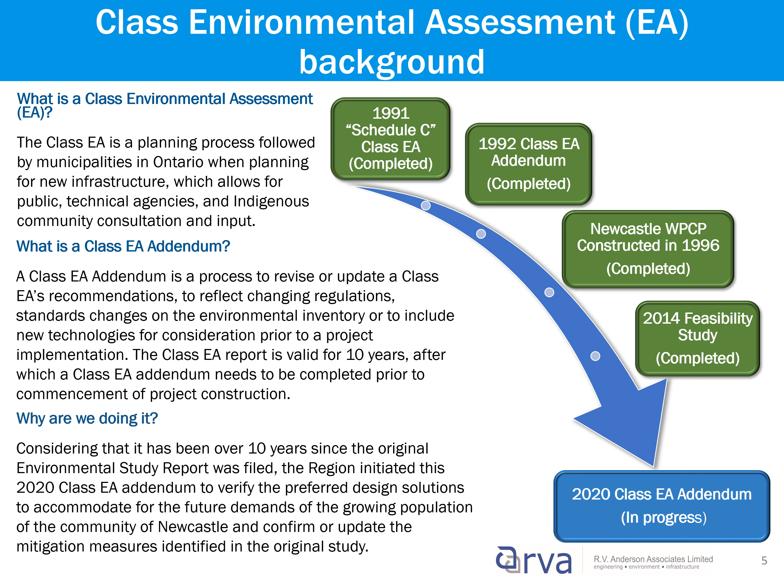There are a total of 4 steps in the study. Step A, which includes the publication of the Notice of Commencement, was initiated in June 2020 and identified the problem and opportunity statement. Step B is where we are right now. It involves completing the required background studies and confirming design solutions for the capacity re-rating and upgrades for the Newcastle Water Pollution Control Plant. The preferred solutions are being presented for feedback from the public as part of this PIC. Upcoming steps include Step C, which is to prepare a Class EA addendum report for public review, and Step D is implementation, which in this case includes design and construction of the preferred solution.

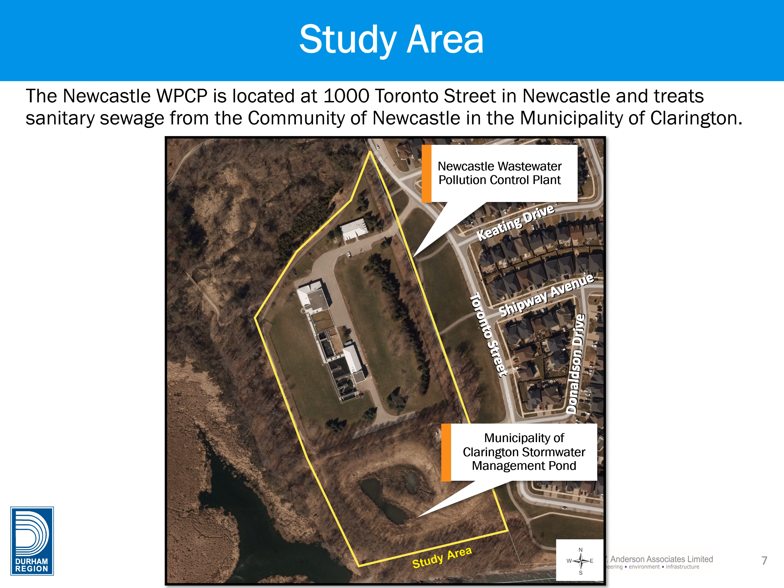Slide 8 shows the historical timeline of the Newcastle Water Pollution Control Plant. In 1991, the Region of Durham completed a Schedule C Class EA study to determine how to treat wastewater generated by the growing community of Newcastle.

The study ultimately recommended that the old Graham Creek Water Pollution Control Plant, which was treating the sanitary sewage for the community at that time, be decommissioned, and a new plant, currently the Newcastle Water Pollution Control Plant, be constructed in 4 stages.

Shortly after the completion of the 1991 study, the region initiated a Class EA addendum in 1992 to reevaluate the preferred treatment process alternatives and recommended that the newly proposed Newcastle Water Pollution Control Plant use a conventional activated sludge process, or CAS. In 1996, the new plant was constructed and commissioned with an initial capacity of 4,086 cubic meters per day.

The old Graham Creek Water Pollution Control Plant was then demolished. Due to the continuing growth in the community of Newcastle, the region undertook a feasibility study in 2014 to identify upgrades required to provide additional wastewater capacity at the plant while ensuring compliance with effluent limits. The study confirmed that the plant capacity could be increased by completing capital upgrades and operational modifications, which will be further described in later slides.

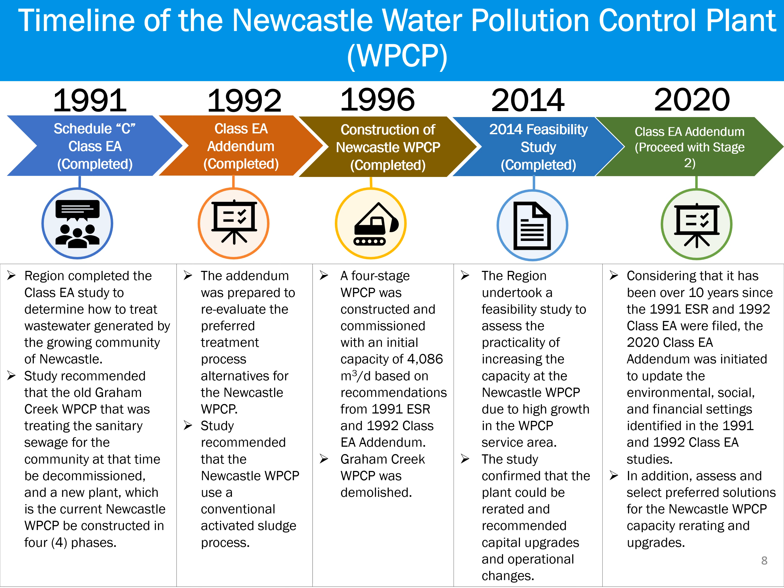The main objective of this Class EA addendum is to update the environmental, social, and financial settings identified in the 1991 and 1992 Class EA studies, and to assess and select preferred solutions for the Newcastle Water Pollution Control Plant capacity re-rating and upgrades. The plant uses the conventional activated sludge, or CAS, treatment process and currently operates at an average day flow, ADF, of approximately over 4,000 cubic meters per day.

The treatment processes at the plant are as follows. Number 1: the raw sewage pump station receives raw sanitary sewage, also known as influent, and pumps it into the first treatment process. Number 2: the screening process removes large objects in the influent such as debris, paper, plastics, and rags to avoid damage and clogging of the treatment equipment downstream.

Number 3: after screening, the influent goes through the grit removal process to remove heavier and finer solids including sand, gravel, etc. Number 4: after grit removal, the influent is processed in the primary clarifier to remove floating and settleable solids. Number 5: the CAS aeration tank process is a biological process used to further treat and break down contaminants in the influent using microorganisms.

Aeration tanks and blower equipment are used for the CAS process. Number 6: ferrous chloride, a chemical compound, is added in the liquid stream in the aeration tanks to precipitate and remove phosphorus. Number 7: the CAS effluent then flows into the secondary clarifiers for further settling and separation of solids from the liquid.

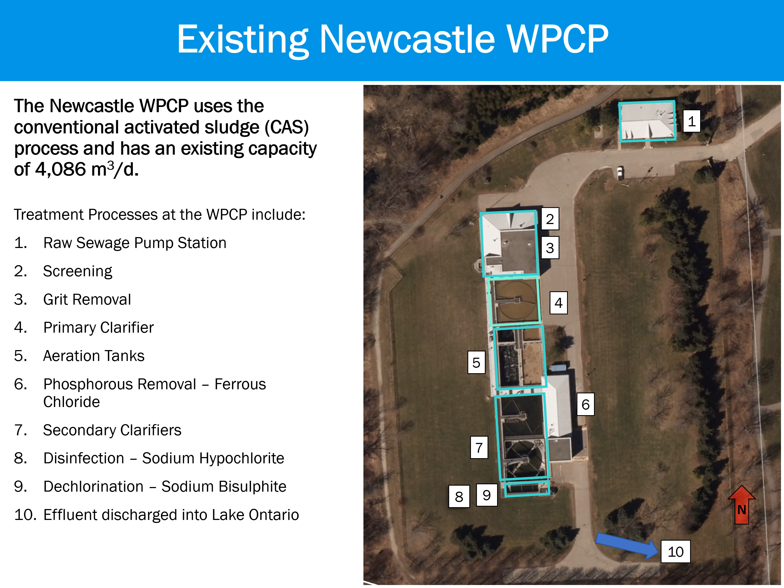As part of the Class EA addendum process, the Environmental Assessment Team has identified the problem and opportunity statement for this project. The 1991 Class EA and 1992 Class EA addendum project objectives were reviewed, and the Class EA addendum problem and opportunity statement was updated as follows.

The existing Newcastle Water Pollution Control Plant requires improvements to existing services and additional sewage treatment capacity to allow for future growth for the community of Newcastle.

To address these improvements, this Class EA addendum will review and confirm the preferred solutions that will: Number 1, meet the growing needs of the Newcastle community in Clarington by increasing the sewage treatment capacity of the plant through infrastructure optimization. Number 2, address the plant's sustainability by using more efficient equipment.

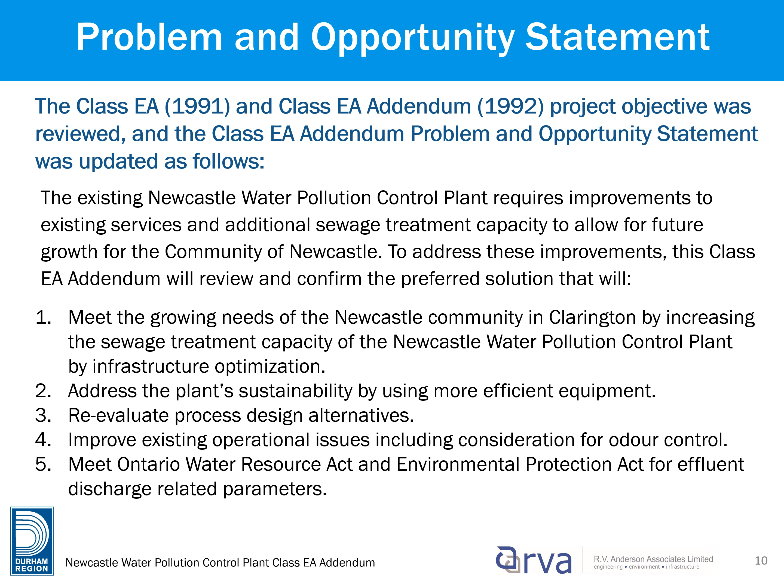Number 3, reevaluate process design alternatives. Number 4, improve existing operational issues, including consideration for odor control. And number 5, meet Ontario Water Resource Act and Environmental Protection Act requirements for effluent discharge related parameters.

In 2014, the Region of Durham completed a feasibility study to determine whether the existing Newcastle Water Pollution Control Plant could be re-rated from its current average day flow, or ADF, of approximately over 4,000 cubic meters per day and peak flow capacity of 12,300 cubic meters per day to a higher flow, in order to provide additional capacity for growth and reduce the capital costs of the next expansion.

The feasibility study included an evaluation of the existing plant, field investigations, and bench scale testing to determine the potential for re-rating by optimizing or implementing low capital cost modifications to the existing plant. The study confirmed that the plant can be re-rated to 7,200 cubic meters per day if certain upgrades and modifications were implemented. As part of this addendum, these upgrades and modifications were further assessed, and the recommended upgrades to be carried forward for implementation have been identified.

Capital upgrades from the 2014 feasibility study included in this 2020 Class EA addendum include raw sewage pumping upgrades, screening upgrades, aeration system upgrades, outfall diffuser modification, secondary clarifier weir modifications, and disinfection system upgrades. Details of these upgrades will be reviewed in further detail as part of this PIC.

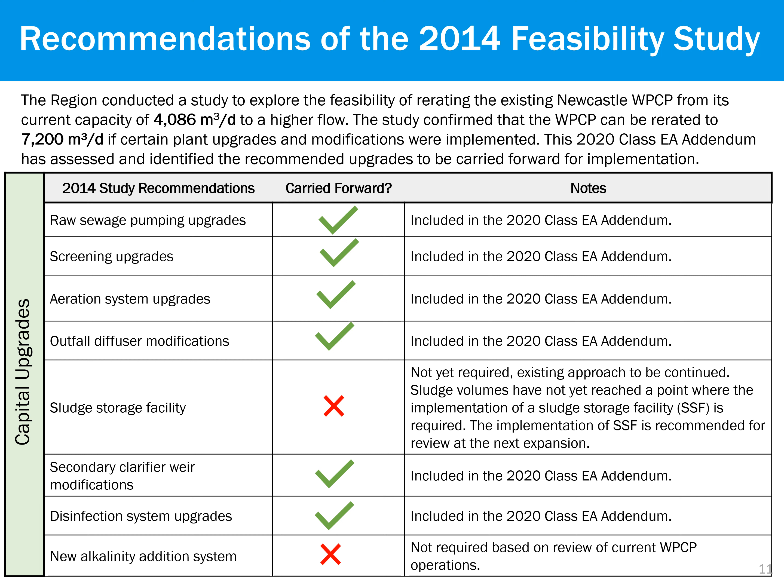Addition of a new alkalinity system is not yet required for the re-rating of the water pollution control plant, based on an updated review of the current water pollution control plant operations.

The next few slides provide a high-level comparison of the 1991 EA and 1992 addendum recommendations and the current 2020 addendum recommendations. The table presented on slide 12 summarizes the comparison of Stage 2 water pollution control plant expansion between the 1991 and 1992 EA studies and the 2020 addendum recommendations.

The 1991 and 1992 EAs recommended the construction of a new water pollution control plant that could be expanded in stages as the flow to the plant increased. At Stage 1, the new water pollution control plant was recommended to be constructed to handle an average day flow, ADF, of approximately over 4,000 cubic meters per day. It was also recommended that some key infrastructure be upsized to handle future higher flows, while other infrastructure and equipment could be added or upgraded in the future. This recommendation was implemented, and the Newcastle Water Pollution Control Plant was constructed and commissioned in 1996.

Currently, the Water Pollution Control Plant has an average day flow rated capacity of 4,086 cubic meters per day, which matches the Stage 1 recommendations. The 1991 and 1992 studies recommended 3 expansion stages based on the average day flow coming into the plant, as follows: Stage 2, approximately over 8,000 cubic meters per day; Stage 3, approximately over 16,000 cubic meters per day; and Stage 4, approximately over 24,000 cubic meters per day.

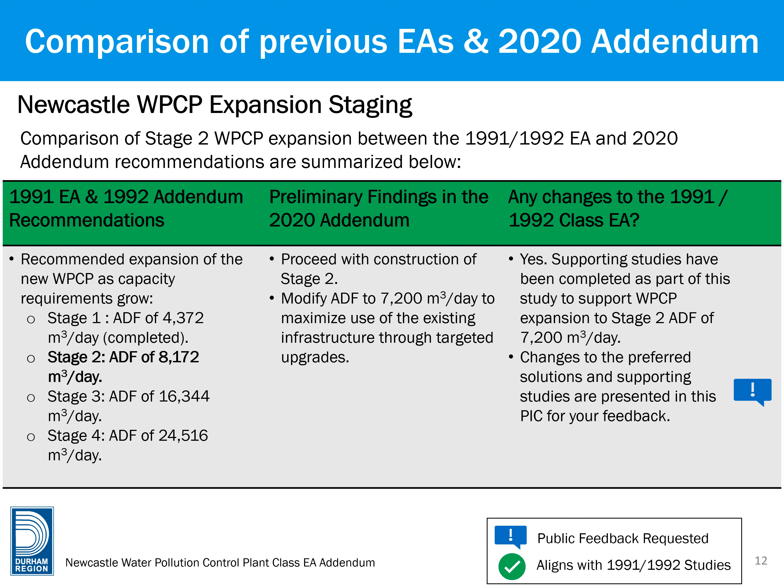Some smaller capital upgrades will be required as part of the Stage 2 re-rating of the Water Pollution Control Plant, which are presented in this PIC. Supporting studies to identify potential impacts and mitigation measures at the Newcastle Water Pollution Control Plant are also presented in this PIC for your review and feedback.

The table presented on slide 13 summarizes the comparison of the various Stage 2 flow scenarios between the 1991 and 1992 EA studies and the 2020 addendum recommendations and proposed service population.

The rated capacity is the amount of wastewater that the Water Pollution Control Plant is approved to treat by the Ministry of Environment, Conservation and Parks, or MECP. The rated capacity is based on the average day flows, or ADF, experienced by the Water Pollution Control Plant. The current rated capacity of the Newcastle Water Pollution Control Plant is approximately over 4,000 cubic meters per day. Currently, the average day flow experienced at the Water Pollution Control Plant is approaching the current rated capacity.

As part of this addendum, it is proposed to increase or re-rate the capacity of the Water Pollution Control Plant from the Stage 1 flow of approximately over 4,000 cubic meters per day to a new Stage 2 flow of 7,200 cubic meters per day to accommodate future growth and increased wastewater flows.

Wastewater treatment plants must also be able to handle peak day flows, PDFs, and peak hourly flows, PHFs, and specific processes and treatment equipment are sized to meet these conditions. The current peak day flow of the Newcastle Water Pollution Control Plant is nearing or at the limit of the capabilities of certain processes and treatment equipment.

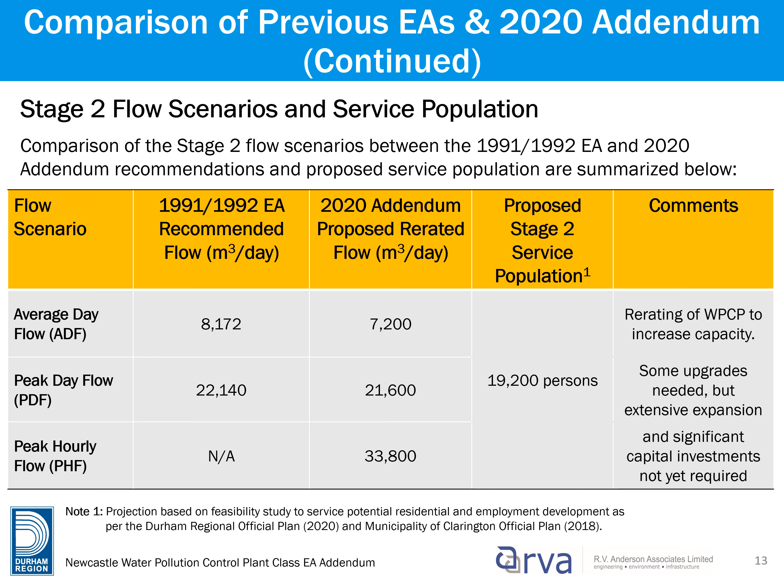Slide 14 shows the Stage 2 upgrades recommended from the 1991 and 1992 EAs in comparison to the 2020 Class EA addendum. The 1991 and 1992 EAs recommended for the Newcastle Water Pollution Control Plant's ADF to be expanded to approximately over 8,000 cubic meters per day at Stage 2. However, no specific process upgrades were recommended for the Stage 2 expansion. In addition, construction of anaerobic digestion facilities for sludge treatment upgrades were recommended.

As part of the 2020 Class EA addendum, it is recommended to re-rate the Newcastle Water Pollution Control Plant's ADF to 7,200 cubic meters per day. To achieve the re-rated capacity, the following upgrades are recommended to be implemented, including raw sewage pumping upgrades, screening upgrades, aeration system upgrades, effluent disinfection upgrades, and outfall modifications, including opening of existing diffusers and disconnection of stormwater sewer.

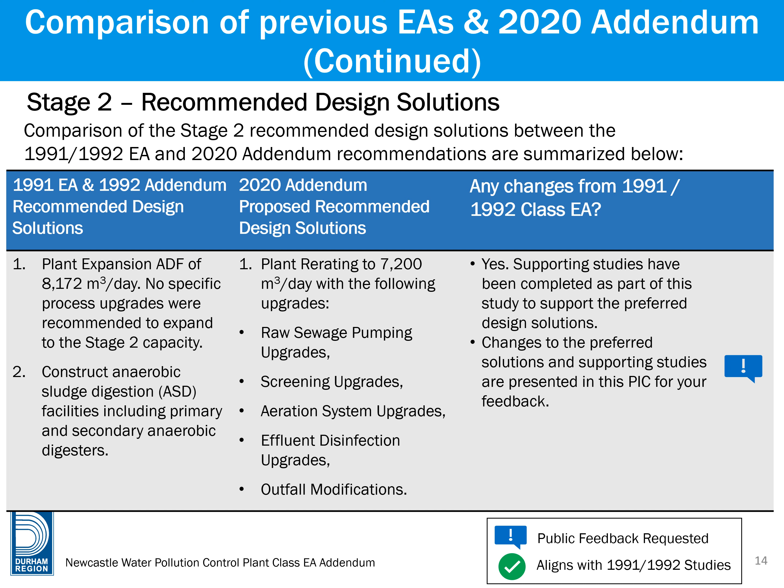It is noted that sludge treatment upgrades were not recommended as part of the Stage 2 proposed upgrades, which will be detailed further in the next slide. As such, this is a change to the 1991 and 1992 Class EA studies. Supporting studies have been completed as part of this study to support the preferred design solutions and are presented in this PIC for your feedback.

As part of Stage 1, a conventional activated sludge, or CAS, process for treatment including on-site storage of raw sludge was constructed. The on-site storage and transfer of sludge to Port Darlington has been ongoing since the Newcastle Water Pollution Control Plant was constructed. The 1991 and 1992 studies recommended that when the capacity of the water pollution control plant will be expanded in Stage 2, an anaerobic sludge digestion facility was to be constructed.

Since the design flow for Stage 2 is being reduced and the current sludge volumes are lower than projected in the 1991 and 1992 reports, the transition to an anaerobic sludge digestion facility is not yet required. This 2020 addendum recommends postponing the construction of a sludge storage facility and maintaining the existing CAS process until the next expansion. This aligns with the 1991 and 1992 EA recommendations, as sludge production has not yet reached the level that would trigger the need for this facility.

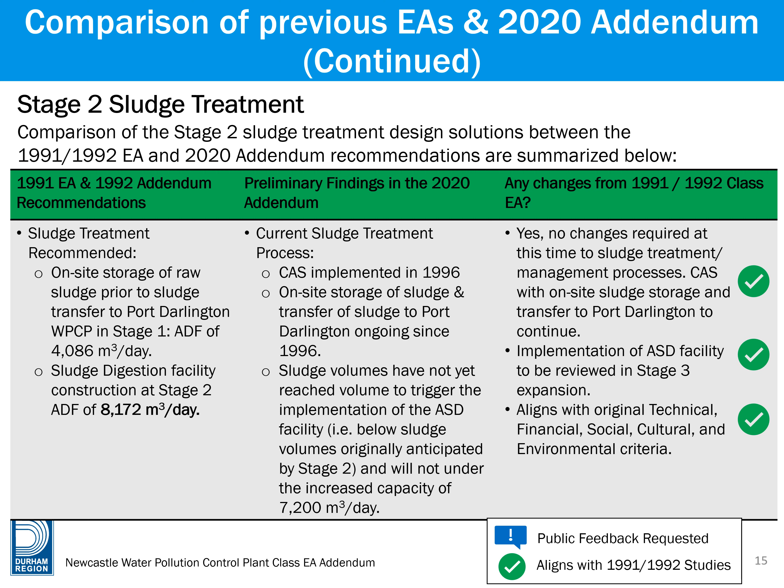As part of the Class EA addendum process, supporting studies were undertaken to support the review of the preferred design solutions, identify potential impacts and mitigation measures, and verify the project and existing conditions are valid for current planning context and legislations. Studies included an archaeological assessment, a cultural heritage assessment, a natural environmental impact assessment, and a geotechnical investigation. The results of these studies are presented in the upcoming slides.

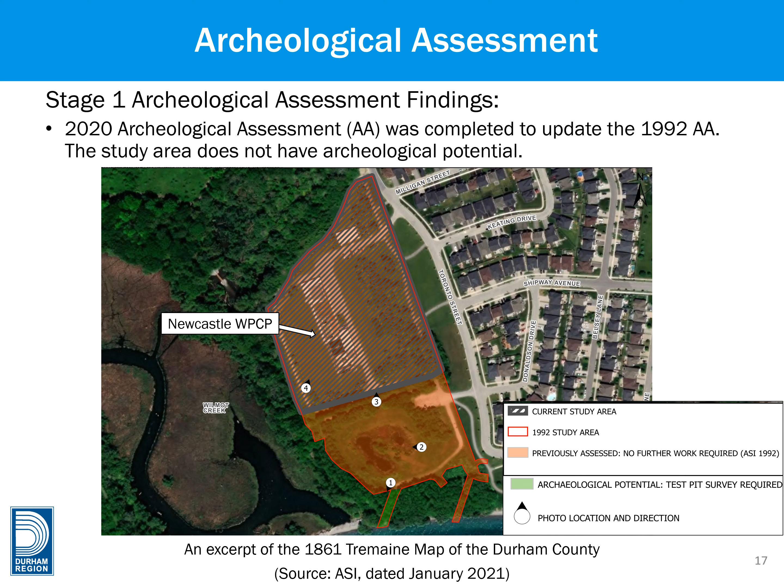The 2020 Stage 1 Archaeological Assessment was completed to update the 1992 Archaeological Assessment. The findings determined that the study area does not have archaeological potential. Therefore, a Stage 2 Archaeological Assessment field investigation is not required for the Class EA addendum.

The 2020 Cultural Heritage Assessment concluded that one built heritage resource, a commemorative feature, was identified within the study area. Mitigation measures include planning construction activities and staging to avoid impacts to the identified built heritage resource, and employing measures such as landscaping, buffering, installation of fencing, and issuing instructions during construction to protect, avoid impacts, and work around the cultural heritage resource. Post-construction rehabilitation will be required to return the existing public pathway to pre-construction conditions.

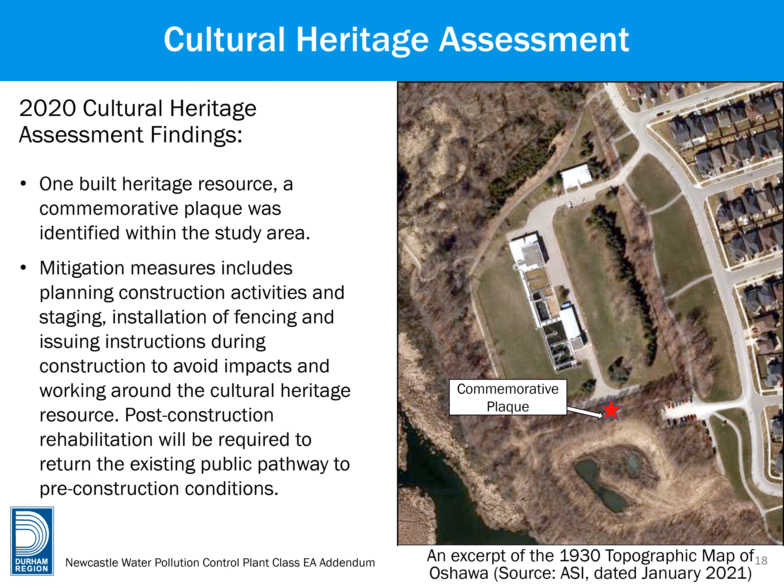Site natural heritage requirements are governed by the Ontario Endangered Species Act (ESA) and the Species at Risk Act (SARA). The 2020 Natural Environmental Assessment findings indicated that mature trees are present within the study area that may provide habitat for bats, birds, and SARA species. Butternut trees are also present outside the study area along the plant's fence line. Breeding birds protected under the Migratory Birds Convention Act (MBCA) were identified to use the habitat in the study area. Timing windows will be required during construction for any vegetation removals to protect breeding bird species.

A setback of a minimum of 50 meters to restrict activities around each individual tree is required. The study area is adjacent to significant natural areas and local water bodies.

Development of an erosion and sediment control plan and spills prevention plan to prevent overland sediment laden sheet flow, or contaminants into these areas.

Fish species at risk including American eel, lake sturgeon, and deepwater sculpin may be present in the aquatic study area. The lake bed in proximity to the outfall diffusers did not demonstrate characteristics of high-quality fish habitat or features that support the most sensitive life cycle processes, such as spawning or rearing young. Potential impacts to fish habitat and necessary approvals will be further considered during design.

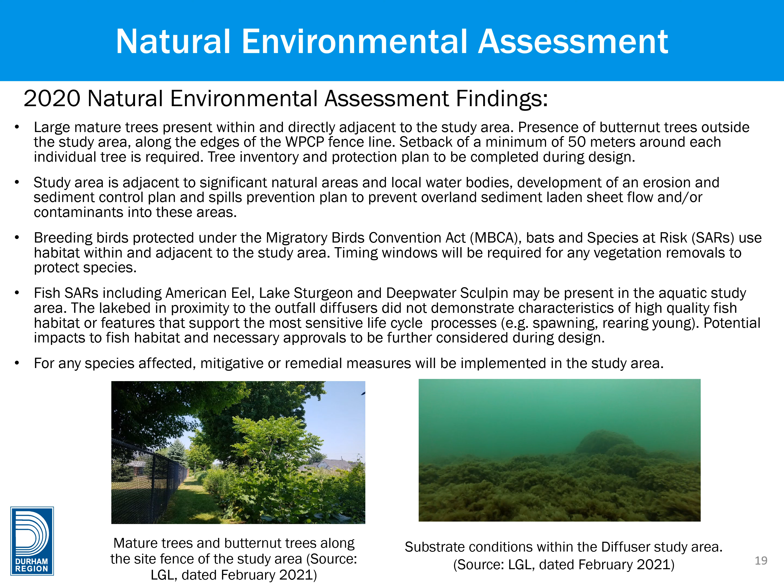For any species affected, mitigative or remedial measures will be implemented in the study area.

A 2020 Phase 1 Environmental Site Assessment (ESA) was completed and found 4 potentially contaminating activities that were identified as low environmental risk within the study area. A Phase 2 ESA will be conducted to characterize the subsurface soil and groundwater conditions and assess where contaminants may be present. This work is currently ongoing and will be completed during design.

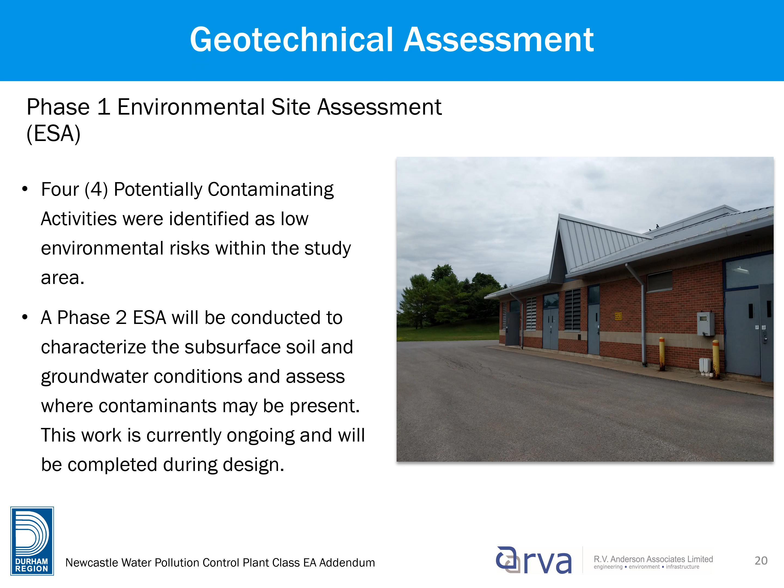The evaluation of design alternatives and selection of the preferred design solutions were completed as part of the 2020 addendum for the following recommended capital upgrades: 1, raw sewage pumping upgrades; 2, screening upgrades; 3, aeration system upgrades; 4, effluent disinfection upgrades; and 5, outfall modifications. A summary of the evaluation and preferred design solutions is presented in the next slides.

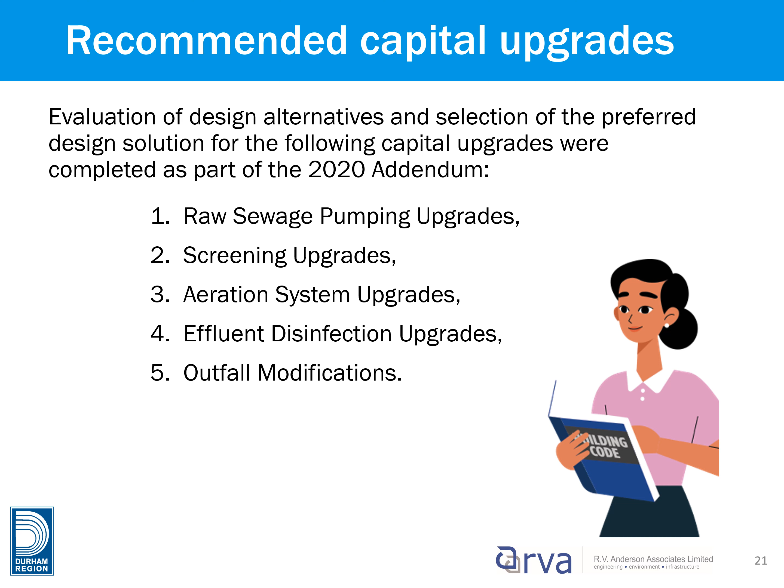The 1991 and 1992 EAs recommended that the raw sewage pumping station be sized to accommodate 4 pumps. 2 pumps were recommended to handle pumping raw sewage up to a peak day flow of approximately over 12,000 cubic meters per day. It was also anticipated that 2 additional pumps would be added and 1 pump replaced as future flows for the water pollution control plant increased.

Currently, the water pollution control plant has 4 pumps installed. 2 additional pumps were installed since 1996 to meet the flow increases over time. This is because the pumps now need to meet the peak hourly flow instead of the peak day flow, requiring a higher overall pumping capacity.

The current peak hourly flow is approximately over 24,000 cubic meters per day, which matches the total pump capacity available if all 4 pumps were available. However, the peak hourly flow must be met by the firm capacity of the pumps instead. The firm capacity refers to the total capacity of all the pumps available, assuming the largest pump is out of service. In this case, the firm capacity is approximately over 18,000 cubic meters per day, which does not meet the current peak hourly flow.

In addition, these pumps are at the end of their service life, are in poor condition, and have operational issues including excess vibration, cavitation, accumulation of grease, and clogging by wet wipes, and are undersized for current operations. As such, these pumps should be replaced for future operation.

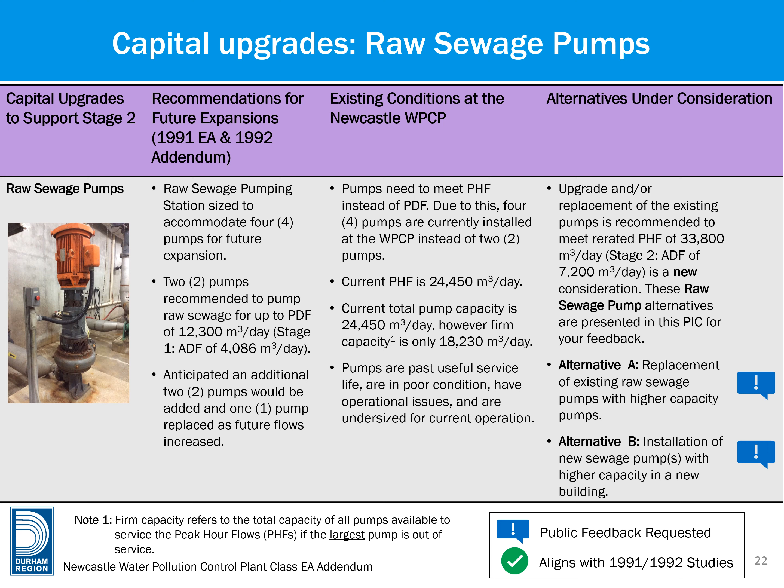Alternative A is a replacement of the 4 existing raw sewage pumps with higher capacity pumps to achieve firm capacity equal to the proposed re-rated peak hourly flow of approximately over 33,000 cubic meters per day. Installation of the raw sewage pumps will be staged to allow sewage pumping to remain operational while each pump is being replaced. Odor control technologies will be reviewed and incorporated as part of the design of this alternative.

Key advantages for Alternative A include a smaller footprint, as the raw sewage pumps will be installed within the existing building. However, it is also noted that space in the existing building for future upgrades may be limited. Other advantages include lower capital and operational costs as construction is kept within the existing building, lower electricity requirements as new pumps will be more energy efficient, and anticipated lower greenhouse gas emissions, minimizing construction works and odor issues to nearby residents.

Key disadvantages for Alternative A include higher construction complexity due to the need to keep the raw sewage pumping online while the new pumps are being installed, and the new pumping capacity will require an MECP approvals update.

Alternative B is the installation of new sewage pumps with higher capacity in a new building. This alternative recommends construction of a building expansion or new building to house new higher capacity raw sewage pumps. The new pumps will work in conjunction with the existing pumps to achieve the proposed re-rated peak hourly flow of 33,800 cubic meters per day. Odor control technologies will be reviewed and incorporated as part of the design of this alternative.

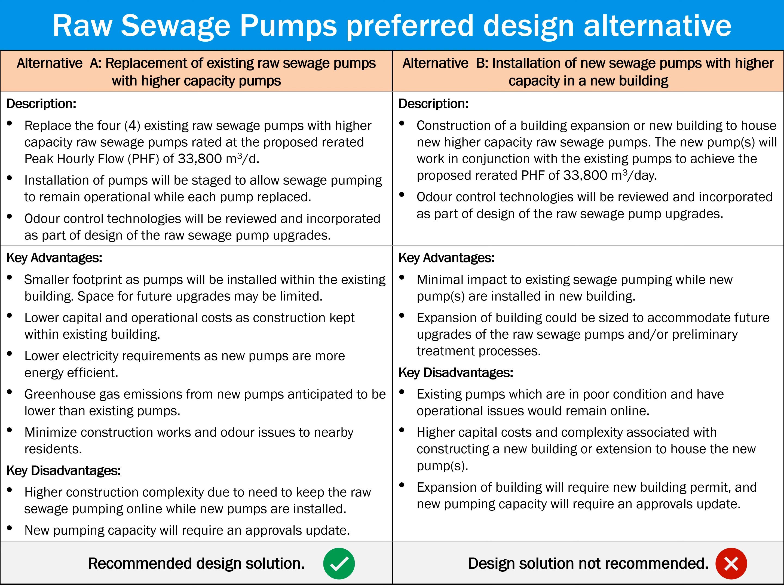Based on the advantages and disadvantages, the preferred design alternative for the raw sewage pump upgrade is Alternative A: to replace the existing raw sewage pumps with higher capacity raw sewage pumps rated at the proposed re-rated peak hourly flow (PHF) of 33,800 cubic meters per day.

The current capacity of the mechanical screen is limited to a peak hourly flow of approximately over 28,000 cubic meters per day. The screen can meet the peak day flow of approximately over 13,000 cubic meters per day. However, it is nearing its capacity for treating the peak hourly flow of approximately over 24,000 cubic meters per day. Due to this, 2 alternatives are identified.

For Alternative A, 1 new screen would be installed in the spare screen channel. This is in line with the 1991 and 1992 EA recommendations. Alternatively, for Alternative B, the spare screen channel could be modified to accommodate a larger screen, leaving the current screen channel as spare for the future. With each alternative, the screens are proposed to meet a re-rated peak hourly flow of approximately over 33,000 cubic meters per day. The alternatives for the screens are presented in this PIC for your feedback.

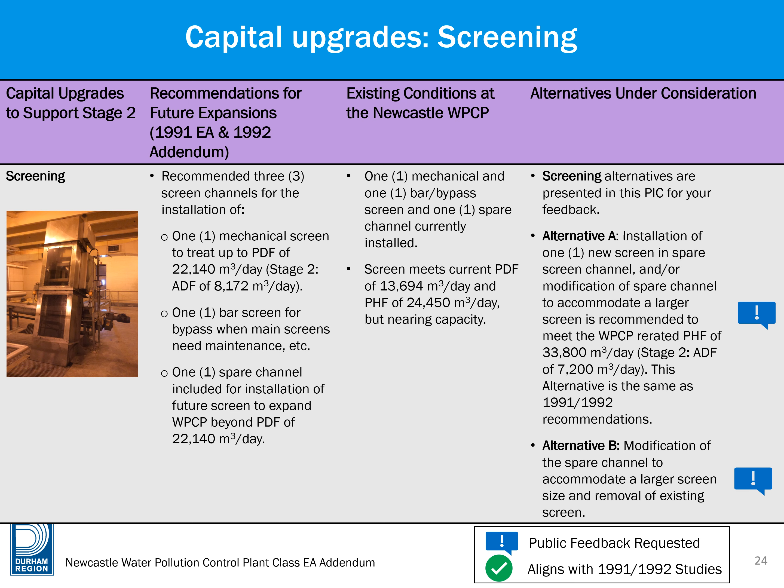Alternative A is the addition of a new screen to the existing spare channel. This alternative involves installation of 1 additional screen into the existing spare channel to provide the proposed re-rated peak hourly flow capacity of 33,800 cubic meters per day. Installation of the new screen in the existing spare channel will not impact the existing screening process. Odor control technologies will be reviewed and incorporated as part of the design of this alternative.

Key advantages for Alternative A include optimization of existing infrastructure and existing screen. The purpose of the existing spare channel was designed to allow for future expansion. Addition of a new screen provides redundancy and flexibility, allowing the screen to be taken offline for maintenance and repairs. It also offers lower capital and operational costs, minimal construction risks since construction is kept within the existing building, and minimizes construction works and odor issues to nearby residents.

Key disadvantages for Alternative A include increased operational complexity and maintenance requirements due to the addition of a screen, no additional future capacity for the screening system, and new screening capacity will require an approvals update.

Alternative B involves expansion of the existing spare channel to house new higher capacity screens, installation of a new screen, and making the current duty channel the standby channel. The new screens will achieve the proposed re-rated peak hourly flow of 33,800 cubic meters per day. The current duty channel will become the standby channel to provide additional future capacity for a future expansion. Odor control technologies will be reviewed and incorporated as part of the design of this alternative.

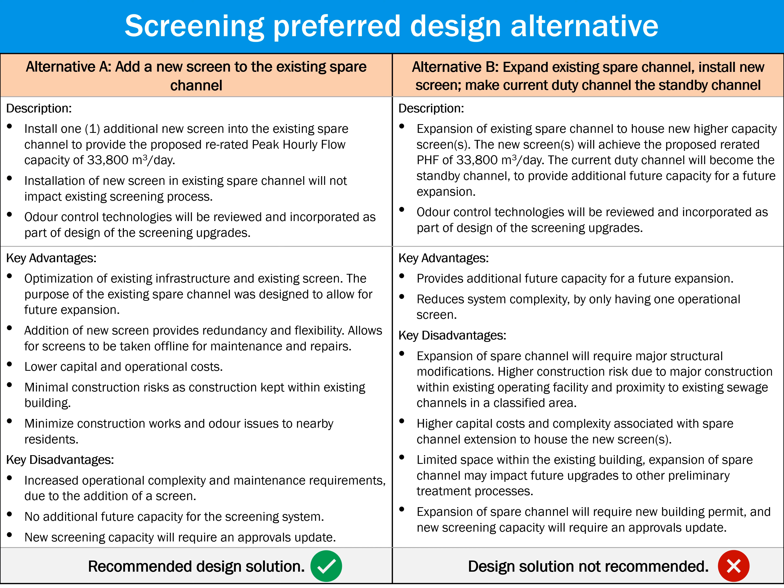The 1991 and 1992 EAs recommended 3 blowers be installed to supply air to the aeration tanks, 2 as duty units and 1 as a standby unit. The blowers were recommended to meet an average day flow for the water pollution control plant of approximately over 4,000 cubic meters per day. No upgrades to the blowers were specifically identified as the plant expanded or aged. Currently, the 3 blowers are installed as per the 1991 and 1992 recommendations, and the firm air supply capacity meets the current air supply demands to treat the overall average day flow of approximately over 4,000 cubic meters per day.

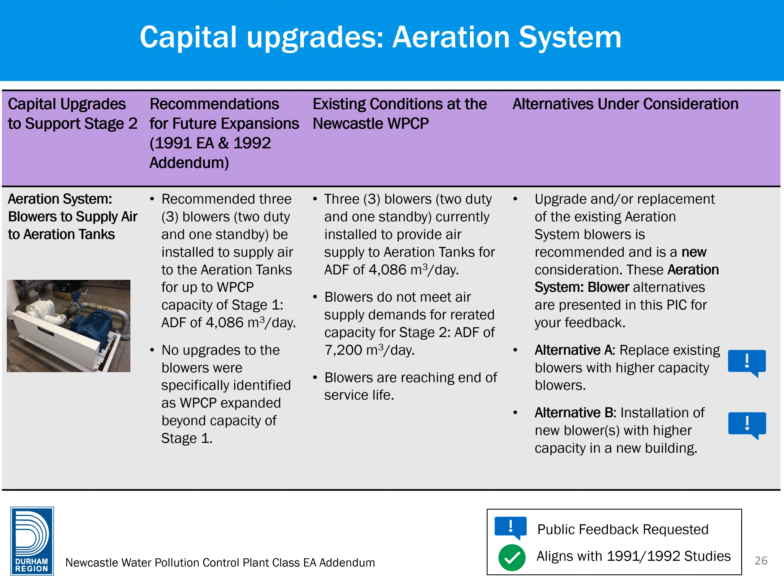However, with the re-rating of the plant to an average day flow of 7,200 cubic meters per day, the air supply demand cannot be met by the current blowers. Additionally, the blowers are reaching the end of their service life. Based on this, 2 alternatives have been evaluated: Alternative A, replace existing blowers with higher capacity blowers, and Alternative B, installation of new blowers with higher capacity in a new building. As the upgrade and/or replacement of the blowers were not considered as part of the 1991 and 1992 EAs, these options are presented in this PIC for your feedback.

Alternative A is a replacement of existing blowers with higher capacity blowers re-rated for the air supply requirements at the proposed re-rated peak hourly flow, PHF, of approximately over 33,000 cubic meters per day. Installation of blowers will be staged to allow for the aeration system to remain operational while each blower is replaced.

Key advantages for Alternative A include: a smaller footprint is required as the blowers will be installed within the existing building, however the space for future upgrades may be limited; lower capital and operational costs as construction is kept within the existing building; lower electricity requirements as the new blowers will be more energy efficient; greenhouse gas emissions from new blowers is anticipated to be lower than the existing blowers; and minimized construction works and odor issues to nearby residents.

Key disadvantages for Alternative A include: high construction complexity due to the need to keep the blowers online while new blowers are installed, and new blower capacity will require an approvals update.

Alternative B is the installation of new blowers with higher capacity in a new building. This alternative recommends the construction of a new building expansion or new building to house new higher capacity blowers. The new blower will work in conjunction with the existing blowers to achieve the proposed re-rated PHF of approximately over 33,000 cubic meters per day.

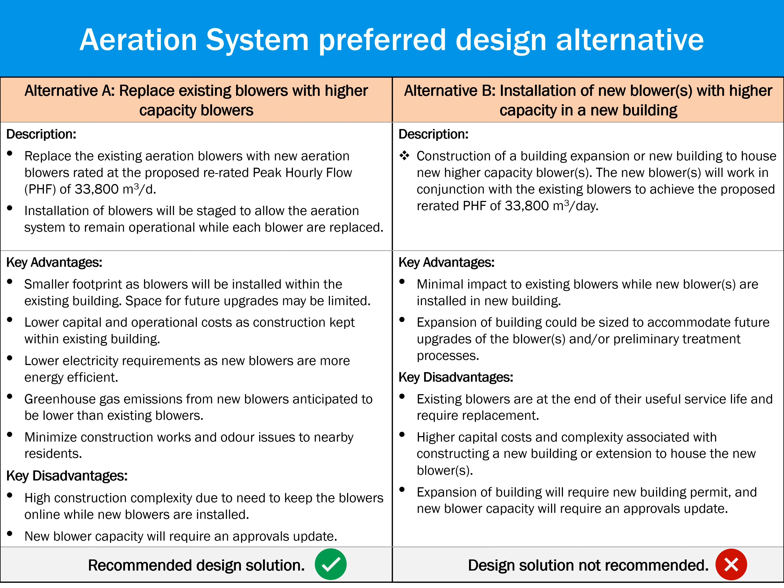Based on the advantages and disadvantages, the preferred design alternative for the new blowers upgrades is Alternative A, to replace the existing aeration blowers with new aeration blowers rated at the proposed re-rated peak hourly flow, PHF, of approximately over 33,000 cubic meters per day. New blowers will provide the increased aeration capacity required for the re-rated plant capacity.

Weirs are included in water and wastewater treatment plants to control the water levels and flows through the plant. They are intended to be adjustable to accommodate changing conditions and avoid the need for major capital upgrades. Under the re-rated peak hourly flows of approximately over 33,000 cubic meters per day, the upstream primary clarifier distribution chamber weir may be submerged. However, upstream processes are not impacted, so no mitigation measures are required.

The secondary clarifier weirs may be submerged. Openings along the launders of the secondary clarifiers may need to be expanded or additional openings added. The launders are channels constructed along the outer edge of the secondary clarifier to collect the secondary effluent and convey flow to the treatment process downstream.

The chlorine contact tank outlet weir may be submerged. The weir level should be adjusted so that it will not be submerged under the re-rated flow. The 1991 and 1992 EAs recommended a chlorination system be used for the disinfection of the effluent or treated water from the Newcastle Water Pollution Control Plant.

This included a chlorine dosing system and a chlorine contact tank (CCT) sized for an average day flow of approximately over 8,000 cubic meters per day. No upgrades were considered as the water pollution control plant aged or expanded beyond that average day flow.

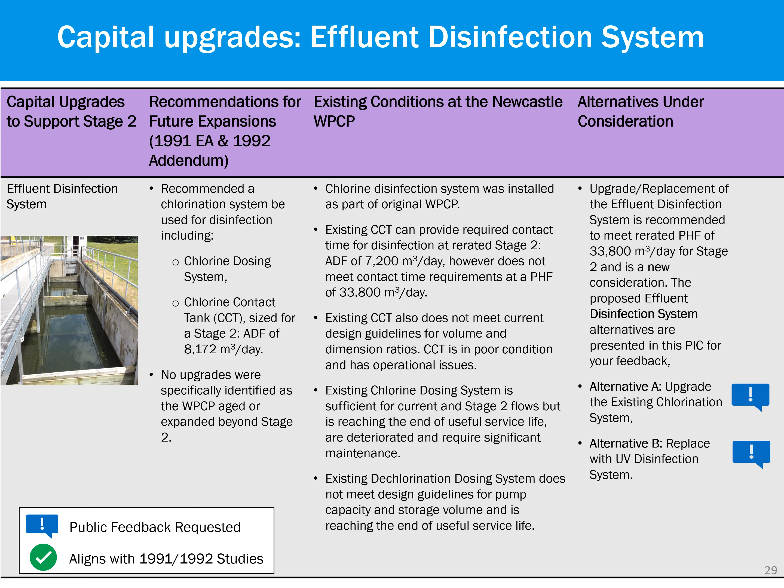Alternative A is the upgrade of the existing chlorination system to treat up to the proposed re-rated peak hourly flow (PHF) of approximately over 33,000 cubic meters per day. Upgrades will be staged to allow the chlorination system to remain operational. Key advantages for Alternative A include familiarity with the chlorination treatment system and lower capital costs to construct the new chlorination contact tank and associated chemical equipment. However, there are higher operational costs associated with chemical usage and regular maintenance.

Key disadvantages for Alternative A include increased operational complexity and maintenance requirements, as multiple chemical systems will be required. Chlorinated water may cause the formation of trihalomethanes and other disinfection byproducts. There are high health and safety concerns due to storage, handling, and transportation of chemicals, and trucking of chemicals is required. Chlorination systems must adhere to stringent federal chlorine residual limits, and new chlorine disinfection capacity will require an approvals update.

Alternative B is a replacement of the existing chlorination system with ultraviolet (UV) disinfection treatment systems to treat up to the proposed re-rated peak hourly flow (PHF) of approximately over 33,000 cubic meters per day. The UV disinfection system uses UV light to disinfect and inactivate viruses and pathogens in the effluent water prior to discharging into Lake Ontario. The design of the system will comply with the Environmental Protection Act for effluent discharge related parameters.

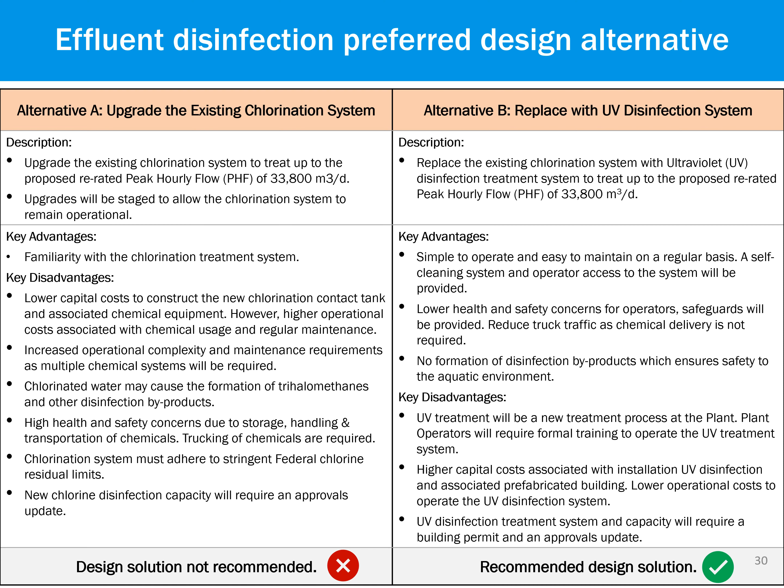Based on the advantages and disadvantages, the preferred design alternative for the effluent disinfection upgrades is Alternative B: to replace the existing chlorination system with an ultraviolet (UV) disinfection treatment system to treat up to the proposed re-rated peak hourly flow (PHF) of approximately over 33,000 cubic meters per day.

The final capital upgrades recommended to support the re-rating of the water pollution control plant are related to the existing outfall. The 1991 and 1992 EAs recommended a 600 mm diameter outfall be constructed for an effluent or treated water peak flow of approximately over 24,000 cubic meters per day. The outfall was recommended to have diffusers which could be opened to increase the capacity gradually as the overall water pollution control plant capacity increased. Once the capacity of the plant was beyond the capacity of the 600 mm outfall, it was recommended that the outfall then be replaced with a 900 mm outfall.

The existing outfall is 600 mm in diameter and currently has 12 of 20 diffusers open, with the remaining 8 diffusers still closed. The existing outfall with 12 open diffusers can accommodate a maximum flow of approximately over 33,000 cubic meters per day. Part of the capacity of the existing outfall is taken up by a storm sewer connection, from which storm water captured on the Newcastle Water Pollution Control Plant site is discharged.

This storm sewer connection decreases the overall capacity of the outfall available for the effluent of the water pollution control plant to a peak hourly flow of 25,000 cubic meters per day. The proposed peak hourly flow of the re-rated water pollution control plant is approximately over 33,000 cubic meters per day, which is greater than the current outfall capacity. Therefore, upgrades or modifications are required.

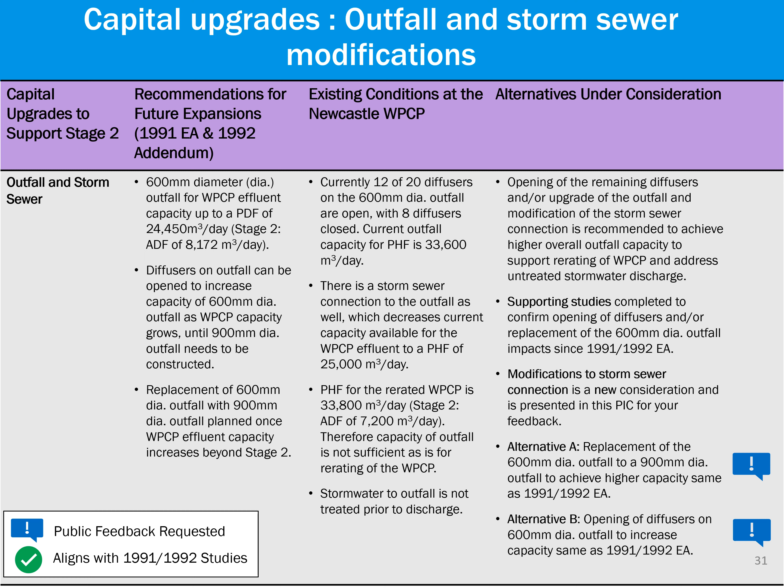The alternative solutions presented in this PIC for your feedback include opening diffusers and modifying the stormwater connection, or replacing the existing outfall with a 900 mm diameter outfall. While opening the diffusers on the 600 mm outfall, and the potential increase from a 600 mm to a 900 mm outfall, are in line with recommendations from the 1991 and 1992 EAs, rerouting the stormwater sewer connection from the outfall is a new consideration. As such, these alternatives are presented in this PIC along with the supporting studies for your feedback.

Alternative A is the replacement of the existing outfall with a higher capacity outfall. This alternative recommends replacing the existing outfall with a larger outfall that will provide higher capacity to accommodate future growth beyond the Stage 2 expansion in the Newcastle community.

Key advantages for Alternative A include increased outfall capacity to accommodate for future growth beyond Stage 2, and the existing stormwater pipe can remain connected to the outfall. Key disadvantages include extensive approvals and additional studies required to confirm feasibility of the new outfall construction. This upgrade will be a major change to the existing outfall and will require further studies to be completed as part of the Class EA addendum, which may prolong the project schedule.

Higher capital costs are associated with construction of the new outfall. Higher construction risk and complexity associated with the construction may have potential impacts related to aquatic habitat in Lake Ontario. The new outfall capacity will also require permits and approvals updates.

Alternative B is opening the existing diffusers and disconnecting the stormwater connection. This alternative recommends modification to the existing outfall, including opening of diffusers to increase the outfall capacity for the re-rated peak hourly flow planned capacity of approximately over 33,000 cubic meters per day. The existing stormwater sewer currently connected to the outfall will also be disconnected, and stormwater will be captured on site.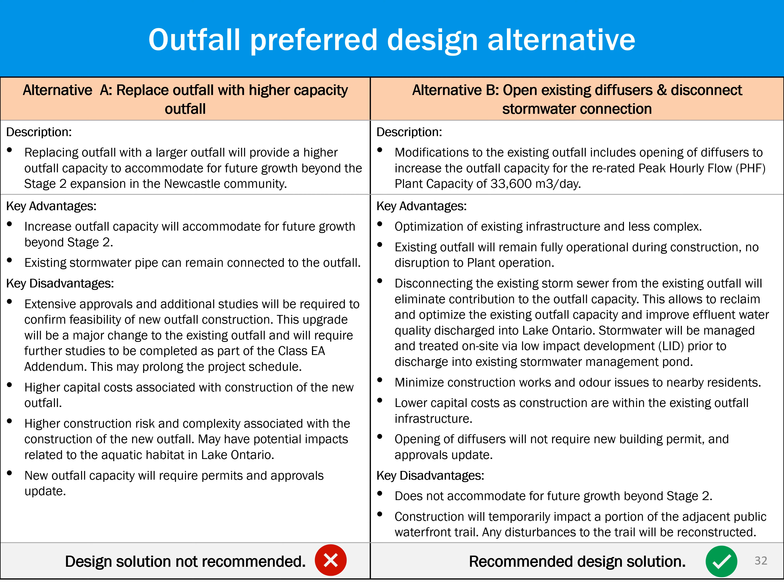As part of the Class EA addendum, the project team has developed a list of potential concerns or impacts that may arise from these works and has developed mitigation strategies to address them. A list of potential concerns and mitigations is shown in the following table.

For concerns related to construction noise, traffic, and dust, proper traffic control measures will be required and enforced as part of the construction contract. Construction times will be limited to weekdays during working hours. Finally, construction fencing will be employed to control silt, erosion, and dust. These measures will be monitored and additional measures will be implemented as needed.

For concerns regarding species at risk, construction will avoid disturbing the butternut trees found adjacent to the study area. Additional studies will be conducted during design to confirm potential impacts to aquatic species at risk and implement mitigation measures. Where vegetation removals are required, timing windows will be applied to protect breeding birds and other species. For concerns regarding excess material management, excess construction soil from construction activities will be properly stored, reused, and/or disposed of per the Environmental Protection Act.

Waste generated from construction will also be disposed of in accordance with ministry's requirements. For concerns related to planning and policy, the proposed upgrades to the Newcastle Water Pollution Control Plant were verified to adhere to the planning policies to accommodate for growth in the Newcastle community while protecting Ontario's natural heritage and water resources. For concerns related to source water protection, it is noted that the Newcastle Water Pollution Control Plant is located within the Source Water Protection Area, or Intake Protection Zone, to the Newcastle Water Supply System.

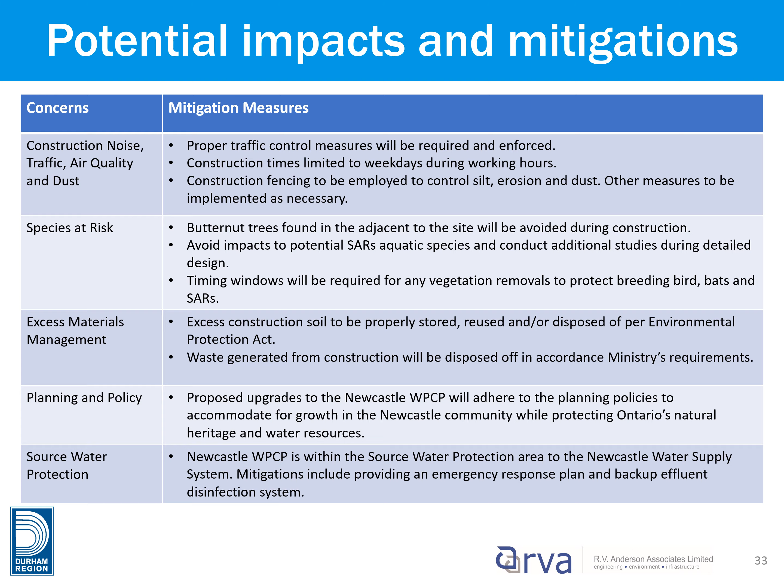For concerns related to ecosystem protection and restoration, if removal of vegetation is required, new vegetation will also be replanted nearby or adjacent to the area. Timing windows to remove vegetation will be avoided during construction to protect breeding birds protected under the Migratory Birds Convention Act, or MBCA. For concerns related to climate change, a setback of 15 meters clearance will be maintained from the 100-year Lake Ontario flood line during construction.

Sediment and erosion control will also be implemented to mitigate impacts on nearby water bodies and aquatic life.

For concerns related to cultural heritage and archaeological impacts, the cultural heritage feature found in the study area will be avoided during construction, and mitigation measures will be implemented to protect the resource. No archaeological potential is present on the site.

For concerns regarding stormwater management, mitigation measures include disconnection of the existing stormwater sewer and treatment on-site prior to discharging into Lake Ontario. Stormwater management design will be developed and implemented as per Ganaraska Region Conservation Authority (GRCA) and Municipality of Clarington requirements.

For concerns related to groundwater and surface water, a hydrogeological study is currently ongoing to address any groundwater monitoring requirements during construction and future operation of the facility, and to properly assess construction dewatering requirements. Stormwater will be managed and treated on site and directed to an existing stormwater management pond prior to discharge into Lake Ontario. Effluent discharge will be treated to comply with Environmental Protection Act effluent discharge related parameters.

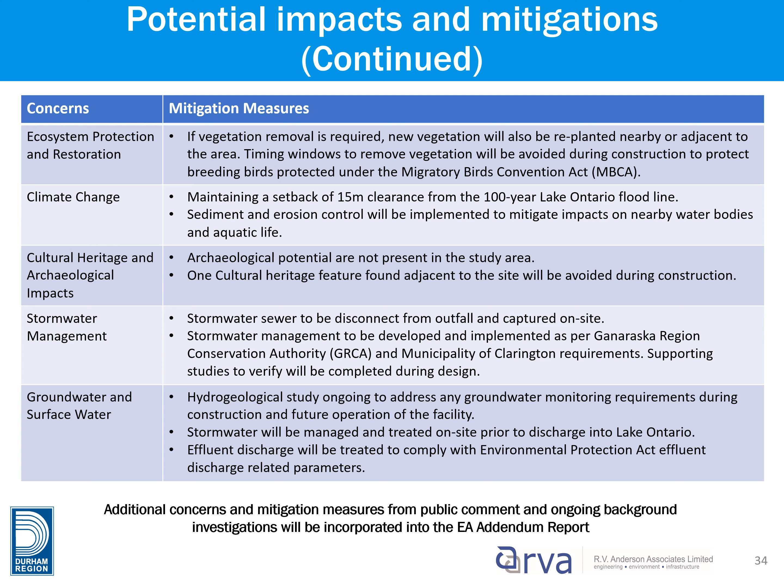Additional concerns and mitigation measures from public comment and ongoing background investigations will be incorporated into the EA Addendum report. As a summary, Slide 35 presents the recommendations from the 2020 Class EA Addendum.

The recommended re-rated capacity of the Newcastle Water Pollution Control Plant for Stage 2 includes an average day flow of 7,200 cubic meters per day, a peak day flow of 21,600 cubic meters per day, and a peak hourly flow of 33,800 cubic meters per day.

To support the re-rating of the Newcastle Water Pollution Control Plant, the following upgrades are recommended: replacement of the existing raw sewage pumps with new higher capacity pumps; installation of a new mechanical screen in the spare screen channel; replacement of the existing blowers with new higher capacity blowers; conversion of the existing chlorine disinfection system to a new UV disinfection system; and weir adjustments and launder modifications as needed.

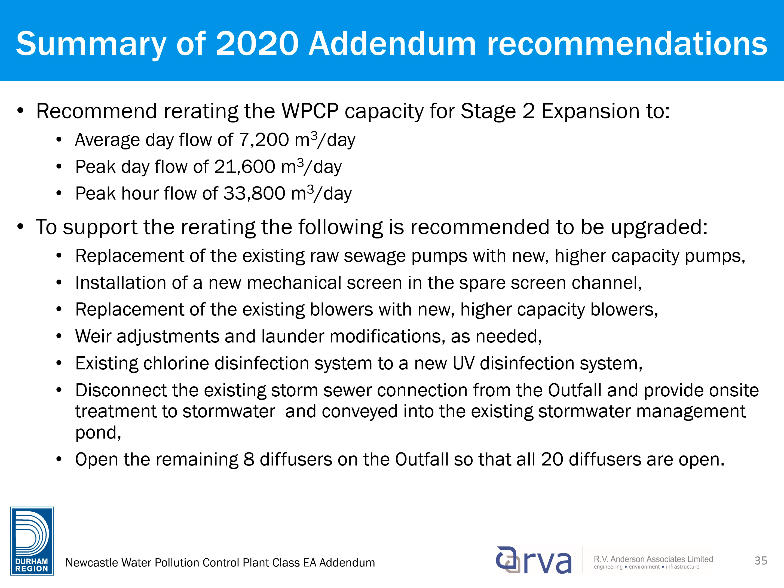Disconnect the existing stormwater sewer from the outfall and manage stormwater on site prior to discharge into the existing stormwater management pond before ultimately discharging into Lake Ontario. Open the remaining 8 diffusers on the outfall so that all 20 diffusers are open.

Following this PIC, the next steps for the project team will be to: first, review and consider public input and comments received after this PIC; second, prepare the Class Environmental Assessment Project File Report summarizing the entire study results; third, issue a notice of study completion and publish the project file report on the public records for a final public review period of 30 days; fourth, review any further comments from the community during the 30-day review period and complete the Class Environmental Assessment process.

Once the Class EA Addendum process has been completed, the Region of Durham will work on the detailed design of the various upgrades and modifications to support the re-rating of the Water Pollution Control Plant. Construction of the upgrades will then follow.